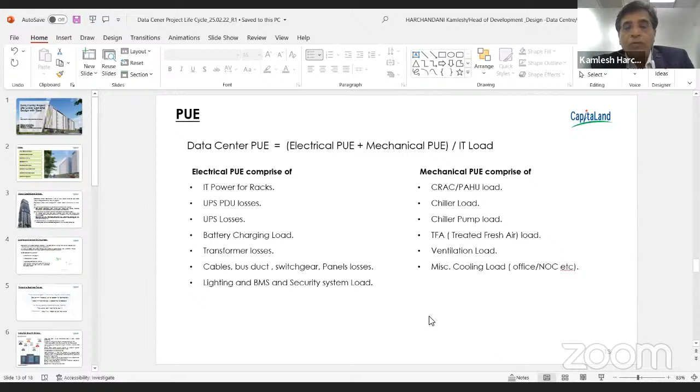Hope this screen is visible to everyone. Carol, could you confirm please? Carol? Visible, sir. Thank you so much.

Again, I would like to thank the Indian Steel Construction Council for giving me this opportunity to talk on the data center subject, specifically on project lifecycle, cost, and design with steel.

To begin this presentation, I would say that, like most industries, the data center industry has evolved in recent years. I think Mr. Gupta also spoke about the growth happening in this industry. In fact, in the current central fiscal budget, the data center industry has also been given infrastructure status, which will definitely give a significant push to the country's digital infrastructure.

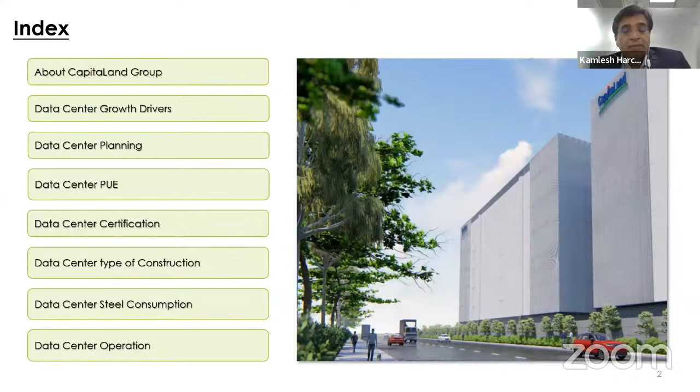To move on to this topic, I'll talk about the particulars in this slide. I'll take a minute to talk about our group, CapitaLand Group, and the growth drivers - we've already heard from Mr. Gupta, who gave very good inputs on the growth drivers for the data center industry. I'll also touch upon how we carry out data center planning, followed by efficiency in data center certification, the type of construction we use, and data center steel consumption. These are the topics I'll be covering in brief in the subsequent slides.

Starting with CapitaLand: we are Asia's largest diversified real estate group, headquartered in Singapore. CapitaLand's asset under management is about 137 billion Singapore dollars. The most important point I want to highlight is that our CapitaLand Group has been awarded Global 100 Most Sustainable Corporation in the world in 2020. So we are quite a stable organization, and with this we are also getting into the data center business.

We carry deep domain expertise in the data center business, where we develop greenfield and brownfield data centers, and we have a global presence in data centers. We are operating 4 data centers in Singapore, 11 in Europe, and 1 in China. Back in India, we will be setting up data centers starting from Mumbai, Chennai, Hyderabad, Bangalore, and Noida. So we carry good expertise in managing and operating data centers successfully over the past few years. Moving to the next slide.

First I wanted to talk about how business trends are changing in today's world. The time has changed in the current digital world, where Mr. Gupta has also touched upon those points. Earlier, people used to adapt to technology, but today that has changed - technology is actually adapting to people. With this, customer interactions are also flipping. So it's rightful to say that the world won't come to your IT; it's actually your IT that will need to go to the world. That's how business trends are emerging today.

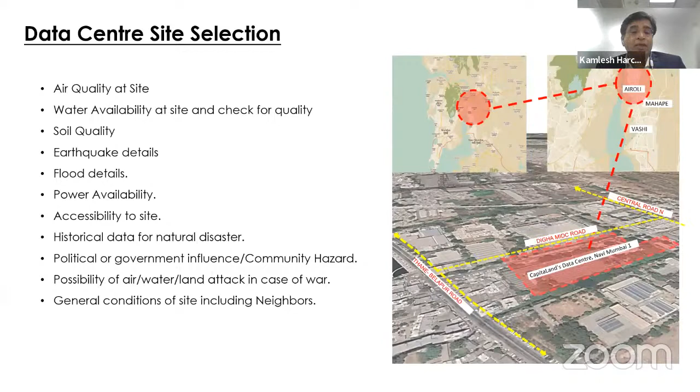Is it only the timeline someone outside sees, that the timeline for data center build is between 17 months to 21 months? Is it only limited to that? So let me give you a brief on what it actually follows largely for most industries when you actually think of setting up a DC in any continent.

You do the market research, which has certain timelines into it. You also carry out the selection of the land parcel. Parallelly, you make out the due diligence of the site in order to ensure the suitability of the land. Over and above, you start working on your design process, and there is a good amount of time you spend not only in the design.

You also go for authority approval, which can range from 6 months to 1 year. So the benchmark to start off your construction at site would be once you get the EC or CTE, the consent to establish, to begin your construction at the site, followed by the construction cycle which I mentioned, and finally with production, the DC is live.

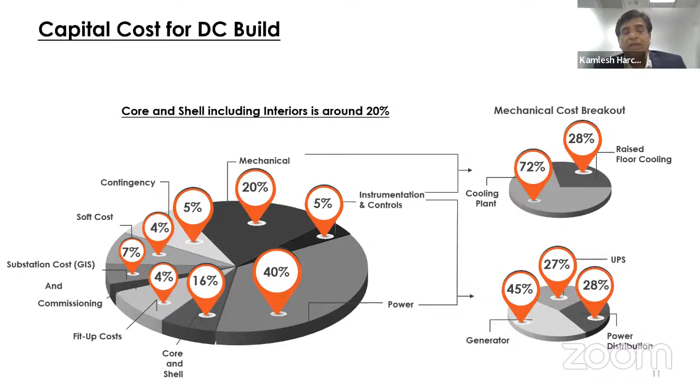So while we were talking about the capital cost of DC, what is very important here is PUE, which is power usage effectiveness. This actually indicates at what efficiency your data center is operating, and it's nothing but a ratio of your total power requirement for a data center facility versus IT load. This PUE was introduced by The Green Grid in 2007.

So when I say the ratio of total power versus IT load, there have been discussions in past years about where this IT load is measured: at a rack level, second at the PDU level which distributes power to the racks, and third at the UPS level. There will be a considerable change in terms of PUE, because when you measure PUE from the UPS for IT load, your losses come into picture for the UPS and the distribution losses before it finally reaches the rack. So it all depends on the way you want to measure this PUE.

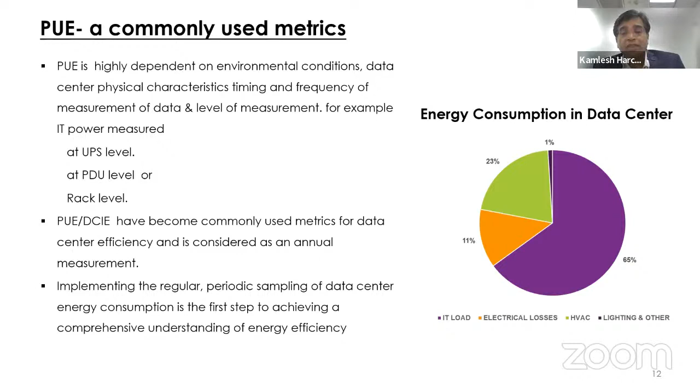But of course, what is important here is where the power is to be measured, so you can target how efficient the data center has to be designed in the beginning itself. Of course, there are parameters to look at for how the efficient design can be made.

So moving on to the next slide. When I was talking about PUE, we have to look in a granular level at how this PUE formula is actually comprised. The PUE is comprised of your electrical PUE, which is the power consumption taking place, and the mechanical PUE, divided by the IT load. I'm talking about these components because you will target these aspects when you are actually setting up a design for your data center.

Why? Because let's say if I talk about the UPS losses, obviously you will ensure that the UPS which you have selected comes with an optimum efficiency. Optimum efficiency in the sense -- we create a redundancy within the data center, whether it's in N+N configuration or N+1 configuration. So what you ensure is the UPS which you are selecting, at least at a capacity of 50%, it should give an optimum efficiency.

Layout plays an important role in terms of equipment placement so that you reduce losses. For example, in a data hall, if you are creating your power distribution within the floor, within the data hall area, obviously your losses will be reduced. So there are a lot of aspects we can target during the design of a data center to make sure it is efficient and optimally designed.

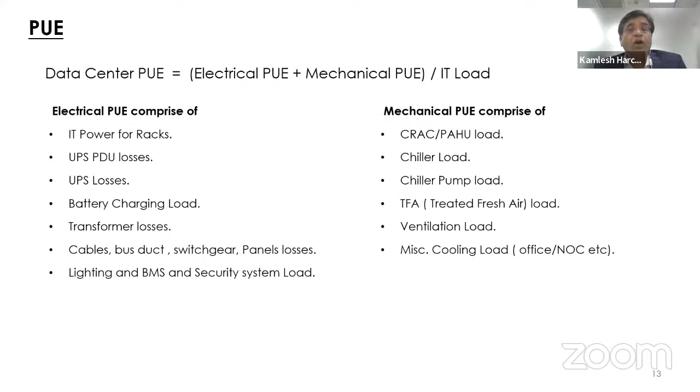Data center certification - in recent years we have seen that data centers are also going for certification. Largely we have seen captive or enterprise data centers going for this kind of certification. There are two certifications which we generally adopt: one is Uptime and second is TIA 942.

Largely it is enterprise and captive data centers that go for certification, but this certification also helps build end client confidence for adopting good design and development practices which can give a high level of performance. Over time, with speculative design, it becomes imperative to use certification, because that finally gives confidence to your end client as well.

Moving on to the next slide, now we'll talk about the type of construction adopted when starting the groundbreaking for the core and shell design. You do construction in three different formats: one is RCC structure in the cast-in-situ method, one is RCC structure in precast, and third is PEB with steel structure building.

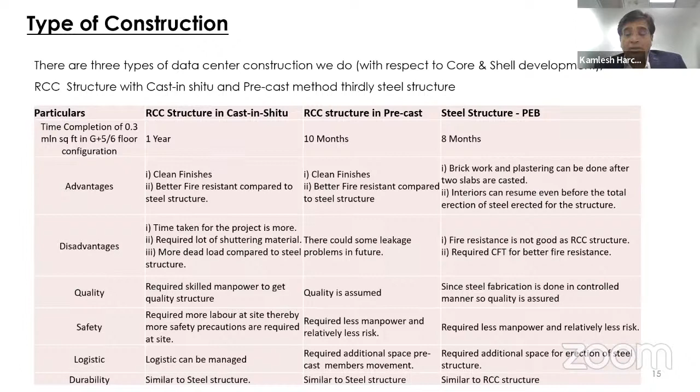Adopting steel structure in recent times has really taken a back foot because of the cost escalation over the last 2 to 3 years. Before I talk on this, let me give you a glimpse of how steel has been used in data center construction, not just limited to core and shell, but also with respect to other DC infrastructure - creating a platform for a DG set, creating a platform for chillers on the terrace. Steel is used in almost every piece of equipment, and this has really escalated cost in recent years.

So maybe let me give you an example comparing a commercial building and a data center building. The steel requirement for a normal commercial building tends to be around 6.5 to 7 kg per square feet. For a data center with a 2000 kg per square meter floor loading requirement, your steel consumption almost goes double. For a steel structure data center building, this is almost 2.5 to 3 times your steel requirement, rather I would say double, compared to cast in situ.

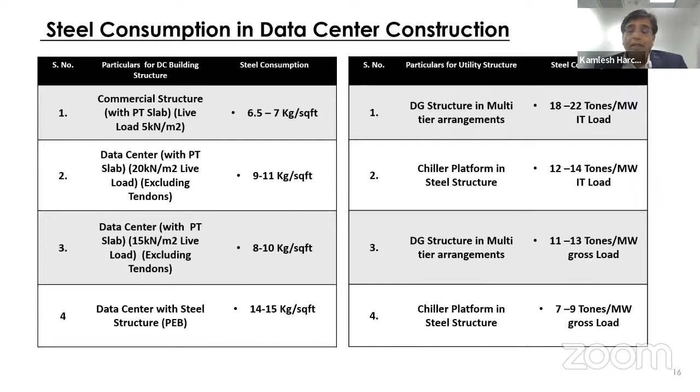Last, but not the least, here I will talk about the data center operation challenges.

You are monitoring your PUE closely, so that each aspect of the data center equipment is being watched closely. As we do the monitoring of data centers, moving on we will closely see how technology is giving opportunity to increase efficiency on the equipment used in data centers.

Why am I giving this example? If you go back 8 to 10 years ago, the UPS losses we've seen were touching around 92 to 93% efficiency. Today the UPSs available can give you efficiency up to 96.5 or even 97%. Why is it so important?

Moving back, we have also seen that if you have limited space for implementing the data center, we have also seen the technology being used for a rotary UPS, where you avoid placement of a DG set within the campus. But because of constraints on UPS efficiency over the period, we have seen that efficiency improved. Now no one is talking about the rotary UPS.

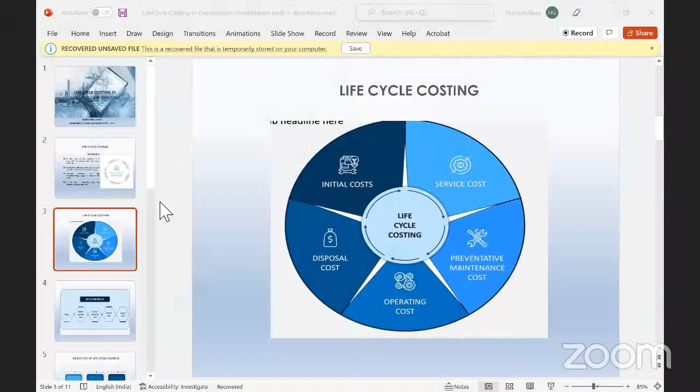The life cycle cost of construction is divided into 5 parts. First is service, second is preventive maintenance, third is operating cost, and the other is disposal cost.

The operating cost has already been discussed by Mr. Kamlesh, so I won't talk about it again. Operating cost is whatever the MEP cost is—that is the operating cost. The rest of the costs we have discussed.

The life cycle cost includes total capital, lifetime operating cost, operating maintenance, disposal cost, and the last one is the disposable value, like salvage value. When we discuss salvage value, steel gives you a salvage value while concrete gives zero. We can also include the salvage cost in the life cycle cost.

Why are we required to do life cycle costing? First, we can understand what is the total cost during the life of the project. We can assess for the management or the team what is the cost.

Second is to identify the reduction effort likely to be more effective. Like suppose we are using RCC, steel, and a number of other things like walls, brickwork, dry wall panels, depending upon the material.

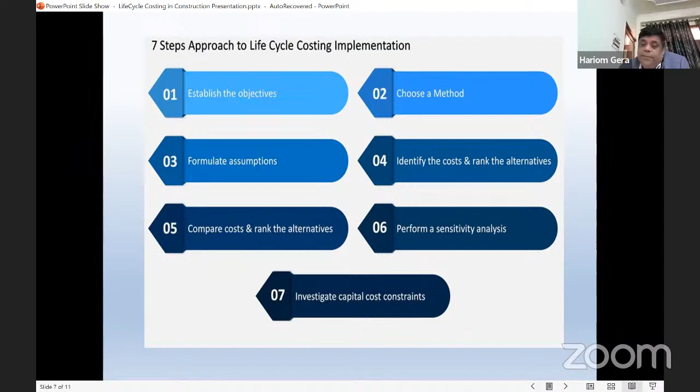When we compare steel and concrete structure, the market share of fabricated structure is only 5%. The rest of the world we have already discussed - this is 65 to 70%.

Perception - this is a reason, this is a perception. Second, absence of quality. Third, experience and efficiency of structural steel work, limited availability of the range of steel sections, and the same for concrete as well. But all of this is perception.

It is the first thing - this is expensive. This is definitely the initial cost coming higher than concrete. But when you are talking about the total cost after 50 or 60 years, then this is very cheap - it may be 20-30% cheaper than concrete also. So when we start the costing of the project, we can consider the life cycle cost also.

The quality of the fabrication - nowadays the number of contractors available, number of manufacturers available, the quality is increasing slowly because steel buildings are increasing day by day.

Structural steel work also design. Nowadays structural consultants, a number of them have started steel design, so it is easily available for steel structures. Range is also available now - number of UB, UC sections, WPB sections, NPB sections, general JSPL sections - each and every section is easily available.

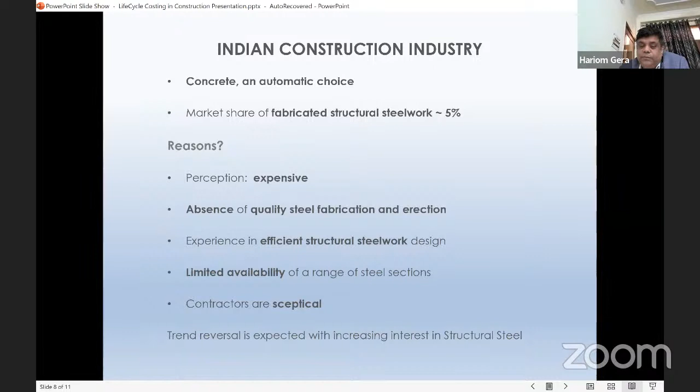Rolled sections also - nowadays the plated rate is higher and the rolled section is cheaper. Slowly the market is shifting to rolled sections, which are very easily available, plus there's less requirement of time for fabrication, and the number of contractors is also increasing. So there is no issue in the steel construction industry.

When we talk about sustainability, with the growing construction market, sustainability has become an increasingly important issue in the construction industries. Nowadays, the London Stock Exchange has correlated the sustainability performance of larger companies in the UK. They're showing that the 50 most sustainable companies perform as well as the FTSE 100 index. So sustainability gives companies some economical value too.

Sustainability development depends upon three factors: environmental, social, and economical. When we talk about environmental, steel construction requires less embodied energy compared to RCC.

When we talk about data centers, the span is generally very high - like an 11 by 11 meter grid. Second is a 15 by 15 meter grid. Third is an 8 by 16, 17 meter grid.

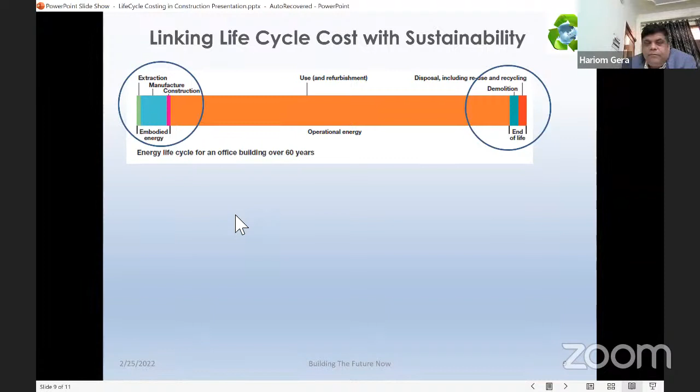The life cycle cost - there's a formula given for how to calculate the life cycle cost of a structure. First is the initial material cost, which includes RCC and steel. Second is the additional initial cost in steel, like corrosion protection or fire protection. Additional initial cost for concrete is zero, and initial material cost in steel is higher. If we bring this together, concrete is always about 20% cheaper.

But when we talk about maintenance and end of life, maintenance cost in steel structures is very less. When we talk about an internal building, like a data center, it's enclosed by walls, then maintenance is required for the internal material.

When we talk about steel, maintenance is required every 20 years. When we talk about RCC, it's required every 10 years. In 10 years, you can check if any cracks have developed in the RCC, because the loading is very high. Maybe due to creep, maybe due to long-term shrinkage, cracks will develop in the RCC structure, because we're calculating based on our past experience with data centers.

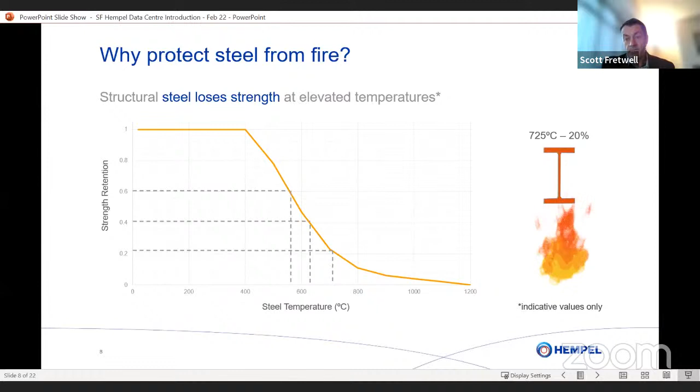We want to limit this temperature rise in steel to prevent steel structures losing stability in the event of a fire. This is important for personnel protection. We want to get people out of the building, and we also want to get people into the building—emergency responders—to tackle the fire.

We protect steel from fire for asset protection. We cannot rebuild buildings every time there's a fire, so maintaining the structural stability of the building after a fire is also important. The contents and assets within the building also need to be protected. And obviously there's also legislation—countries around the world have their own legislation on how we should fire protect steel buildings.

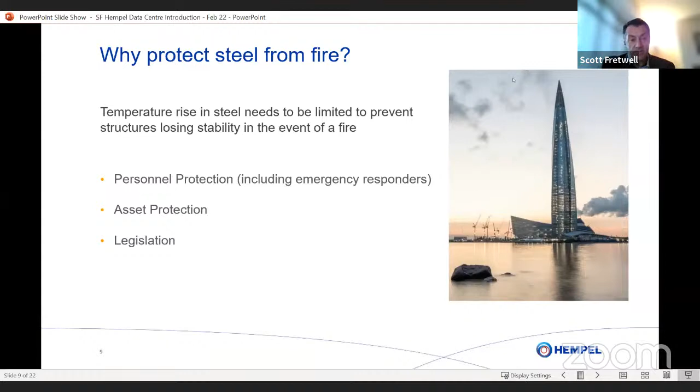Hempel over the years has provided lots of intumescent coating protection to many data center projects for many different customers. These are the majority of global data center projects—we have many completed and many currently ongoing.

But when we started getting involved in data centers, we found it's a little bit more complex than normal buildings. We obviously need to protect the building and both its human and electronic assets, and this can be quite complex. In addition to protecting the steel structure, we have to make considerations for the building contents, especially protection of the electronic elements from dust creation during and after construction, and also involved in fire protection.

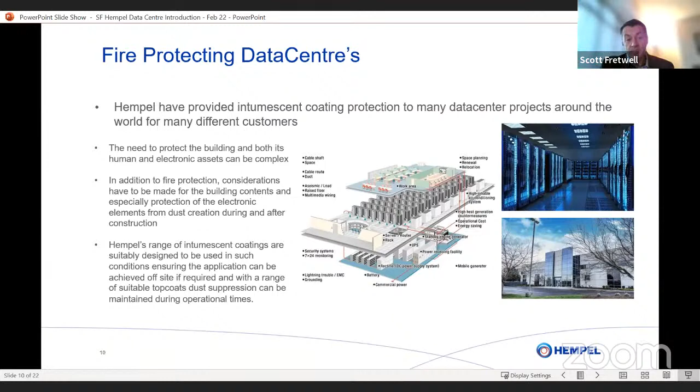We have a range of intumescent coatings which are suitably designed to be used in such conditions, ensuring application can be done off-site if required, and that dust suppression can be maintained during operational times. Dust suppression isn't something we really link with coatings, but it's really a key area when we look at fire protection.

We spoke about the efficiencies and reliability of data centers. Dust suppression is a key one. We know dust particles contain moisture, organic material, and various minerals and chemicals, and all of those will greatly affect the reliability and lifespan of the average computer if overexposed. Dust contains conducting material and metallic elements, which can lead to signal errors and abrupt part failures.

Internal dust accumulation is one of the main principles of premature failure and reliability. We also see questions around maintenance of heat. When in contact, dust also acts like an insulating blanket, which prevents the necessary circuits from cooling. This can cause overheating and electrical shorts, and it's proven that temperature can increase by nearly 30 degrees Fahrenheit due to the buildup of dust. This is significant and can lead to complete failure.

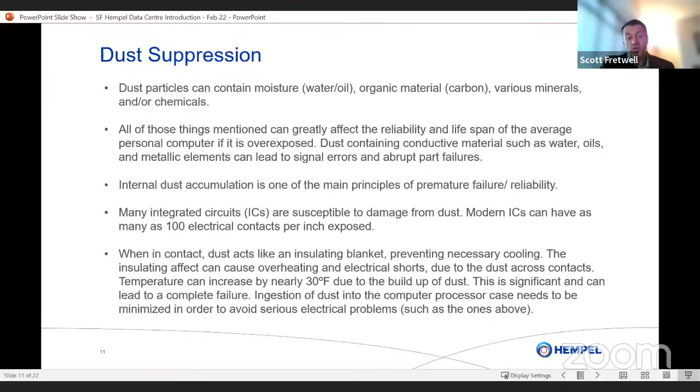Ingestion of dust into the computer processors also needs to be minimized in order to avoid serious electrical problems. So why is that important when we look at fire protection? Well, obviously, when we see on the market, we see the general key technologies used in fire protection.

We have cement sprays. And again, when we look at cement sprays, we look at application on site. There is constant movement from the steel structure, which creates cracking, even after installation and movement of the structure. With cement sprays, you always get the element of dust, and the cracking creates more and more dust as it goes into its service life. Cementitious sprays are also not top coatable, so we can't limit that dust creation.

The other possibility for fire protection is fireboards. But again, these have to be installed on site, and we know that these are fitted, chopped, and cut on site. And again, it leads to a high level of dust suppression required.

However, with intumescent coatings and their properties, this is negated. Intumescent technology creates a low installation cost. It allows for more open building design. Its use of different steel sizes and shapes adapts to shape and flexion, so there's no cracking like we get in cement, no movement. It's fairly damage resistant, with a very low risk of corrosion under the insulation compared to board and cementitious spray. Importantly, it can be applied on or off site, and it offers little or no dust suppression.

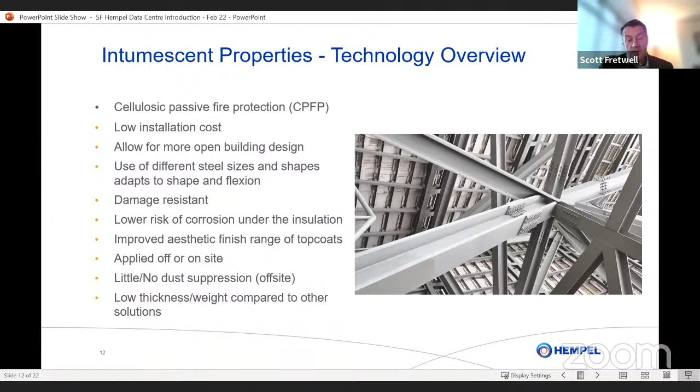But why should we care about paint? We see many times, and we've had many conversations with engineers and architects, that it's a contractor decision, a generic specification is fine, and it is a small part of the project. But as we've just proven, when we look at the application of any fire protection system in data centers, we have to have key considerations on dust suppression and protection.

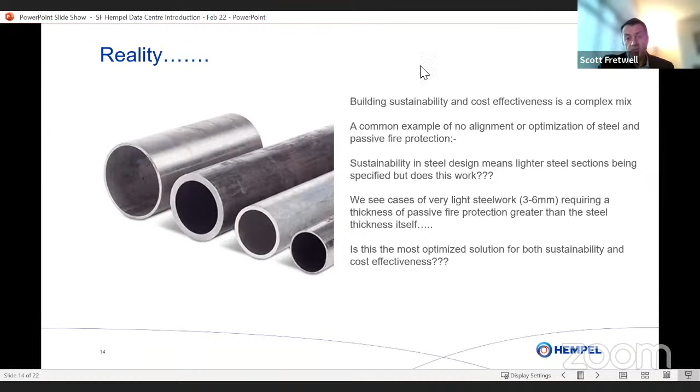And what we also see moving forward in reality is building sustainability and cost effectiveness is complex. A common example we have seen when there's no alignment or optimization of steel and passive fire protection is that, through sustainability in steel, lighter steel sections are specified and used. But does this work? Because when we start using very light steel work, sometimes 3, maybe 6 millimeter beams or hollow sections, this steel itself starts requiring a higher level of thicker passive fire protection, perhaps greater than the steel thickness itself.

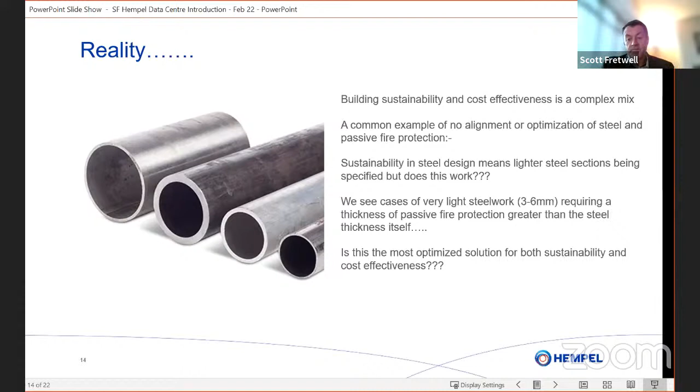Is this the most optimized solution for sustainability and cost effectiveness? I think in our work with engineers and architects across the globe, it's not. We've worked very closely with engineers and architects at design stage and engineering stage to make sure there's full holistic synergy between fire protection and steel design. When we start looking at steel and fire design together, this can bring many added benefits to any project - commercial, on the site program, and also sustainability.

So what value can we bring, or what value have we brought in the past as a paint company to the data center market? Well, we've produced reduction of project costs. We have our own in-house fire engineer, which works with engineers and designers across the world to make sure there's synergy, a holistic view of fire protection and steel. We have a global product supply availability with consistent quality, and we have experienced technical services ensuring quality of application and performance available globally.

With fire engineering, we can look at lower paint thicknesses, reducing material costs and application. And we have global experience and knowledge of fire protection and the data center market.

By getting in at an early stage as well, we can also bring advantages to the site program. Our products and their consistency reduce downtime. All our fire protection factories are audited and third-party accredited. Our technical service guides ensure quality of application and performance.

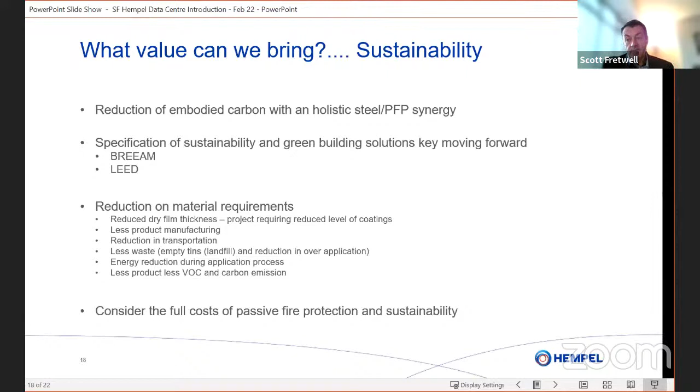And what else can we bring as a company? We bring experience. Hempel is a global company with huge experience in fire protection, anti-corrosion specifications, and experience. Whether it's energy infrastructure, marine, or anti-corrosion specifications, we have a big track history as a company involved in major projects, supplying major projects, and working with some of the major engineers, architects, applicators, and fabricators.

And we do try to create additional value for data centers. Again, we agree with the previous speakers, this is a growing market across the globe. And therefore, we need a global approach, a coordinated global approach. At Hempel, there will be a single point of contact, a focused technical resource. We have much experience in cross-border and pan-continental projects, multi-level relationships, again, with applicators, fabricators, engineers, and designers.

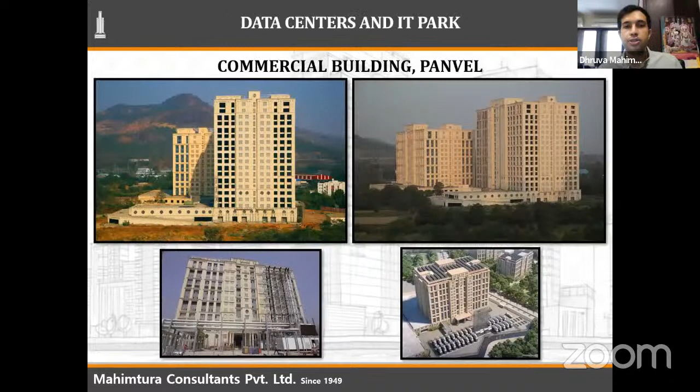Brief introduction. It was initially constructed in 2016 with 1 million square feet. Then the client didn't have any sales of that commercial building, so they decided to convert it into a data center. It's got a basement, 3 podiums, and then 12 stories, which was originally designed for commercial loading. The grid is about 10.8 meters by 10.85 meters and comprises of post-tension slabs with an earlier flat slab and column drop kind of system.

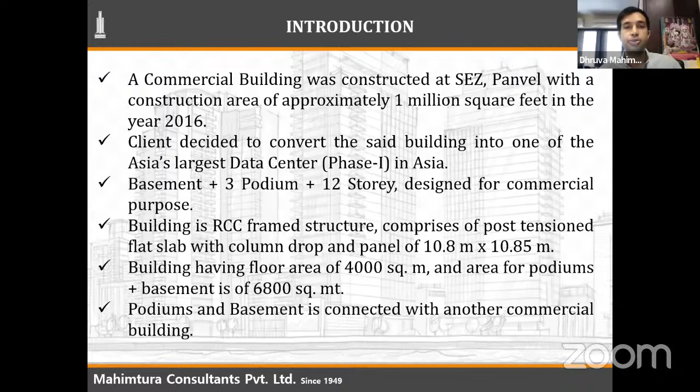The typical floor plate is about 4,000 square meters, and the basement is 6,800. And the podium and basement is actually connected with another commercial building, which is slightly taller than this one.

So this was our brief. We had to convert this commercial IT building into a data center. Basically every alternate floor had to be upgraded to take a loading of 1,500 kg per meter square. Then you had the data center floors, and you had your battery floors, which had slightly lesser loading, 875 kg per meter square. And we had to upgrade it from the 400 kg per meter square live load.

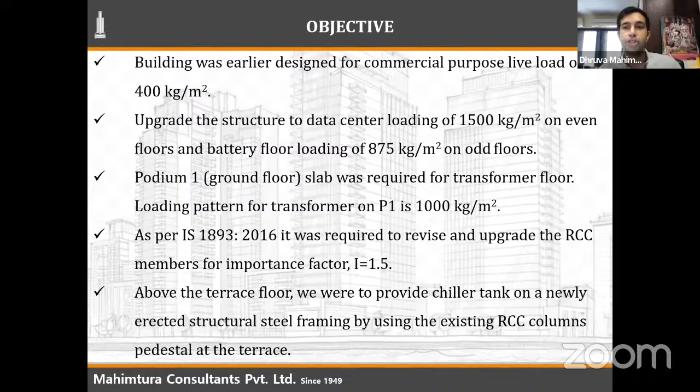In addition to that, there was a transformer added at the first podium slab, and then a chiller platform on top of the terrace, so we had to do that as well. And since we were upgrading the structure, we had to upgrade it to the latest IS codes. So as per the IS 1893:2016 code, we had to jack up the importance factor to an importance factor of 1.5.

So what we started off with was some non-destructive testing as well as a load test. We carried this out because the building was left on its own as is for a couple of years, so we had to ascertain the existing strength of the building and then use those inputs in our analysis.

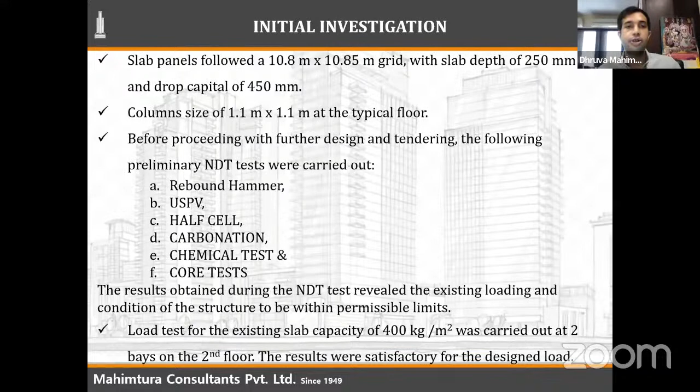We also carried out a load test. This is pretty important because we had to benchmark ourselves and see where we were starting off from, whether the existing slab could take that live load of 400 kg per meter square or not. So that was done in 2 bays on one of the data center floors, and we found our results to be satisfactory in terms of the NDT testing as well as the load test.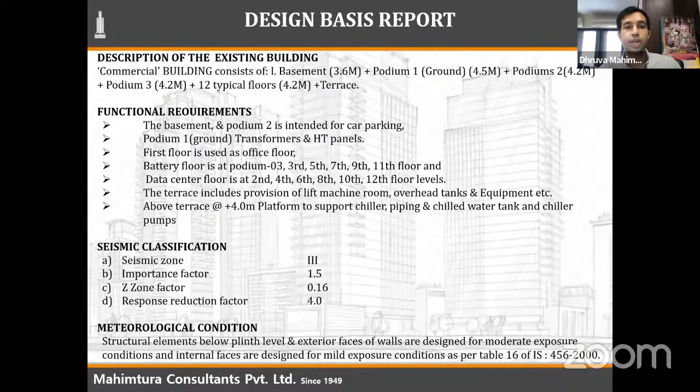A little bit of a design brief: it's in seismic zone 3. We had an importance factor of 1.5. We also had to look at fire rating of any kind of steel members that we were going to use in the upgradation process, so we decided to benchmark it with a 2-hour fire rating for all of those steel members.

We also looked at the soil bearing capacity because now we were upgrading the load, so we had to check the foundations. But we had a good SBC because there was hard rock already available at the site. The existing structural system was basically an RCC column beam frame system with the lift and staircase shear walls taking all of the lateral forces.

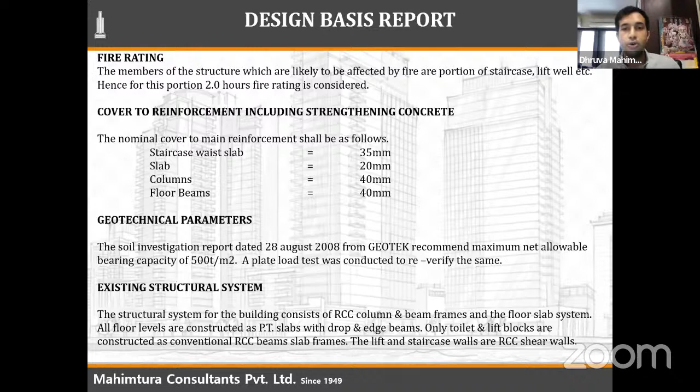We had a PT drop system with edge beams. Only the toilet blocks were constructed with a conventional RCC beam slab system.

Certain grades of concrete were already existing, along with the non-structural wall thicknesses that were also there. Steel grade, regular RCC steel, was Fe500. And then these were the existing loadings that we had.

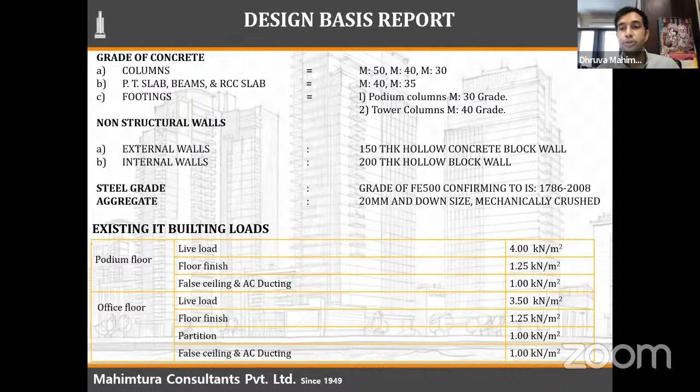So our regular office floor load comprised of about 6.75 kilonewton per meter square, and we had to upgrade that to about 15 kilonewton per meter square. So this was basically what we were upgrading the structure to.

Just want to point out the data center floor, that's what we're focusing on right now. That is a total live load of 15 kilonewton per meter square, with a fixed live load of 10 and then a reducible live load of 5 kilonewton per meter square.

And then the chiller platform coming on top of that, which also had to take 10 kilonewton per meter square. And then you have the fixed component of 8 kilonewton per meter square and a reducible live load of 2 kilonewton per meter square.

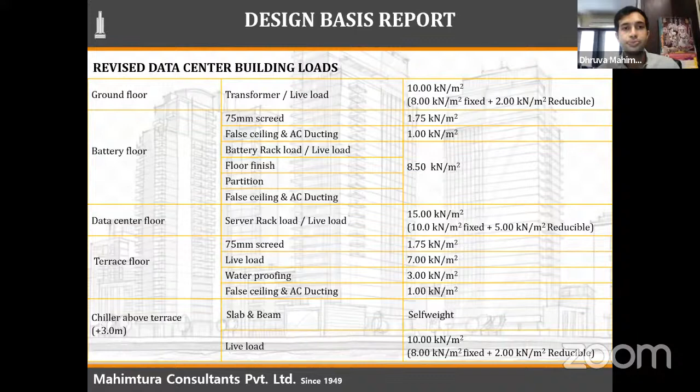This was the kind of strengthening measures that we had to input and carry out on site. So we had to jacket the foundations because the overall loading of the building had gone up, and the importance factor of the building had gone up. So we opened up each and every foundation of each and every column.

We used M55, in some places micro concrete, and in other places regular concrete.

And then for the data center floor, we had to tackle strengthening from the bottom as well as from the top of the slab. The bottom of the slab was strengthened by the use of structural steel I-beams as well as normal carbon fiber wrapping. And then the top of the slab, we had carbon rods along with pre-stressed laminates.

And then we had a 75 mm screed topping on top of all of that, which was a reinforced screed as well, so we could increase the overall depth of the slab. And then the chiller platforms on top.

So we had column stubs from before. We used those column stubs, put a base plate on it, jacketed those sizes of the columns. After putting the base plate, we erected I columns and plate columns with concrete infill. And then after that, we did our connection of the steel grid for the chiller platform, and then we micro concreted the entire thing, basically creating a composite column to support the chiller platform.

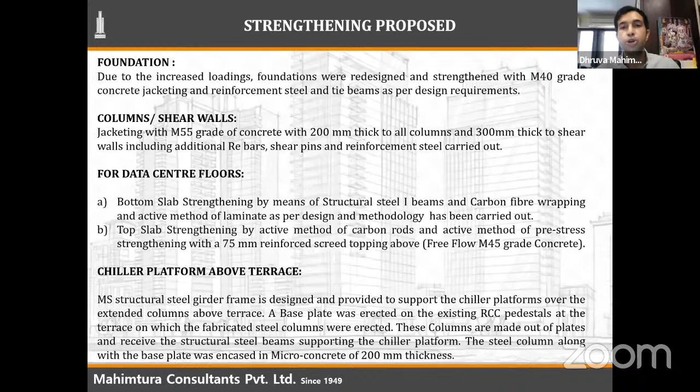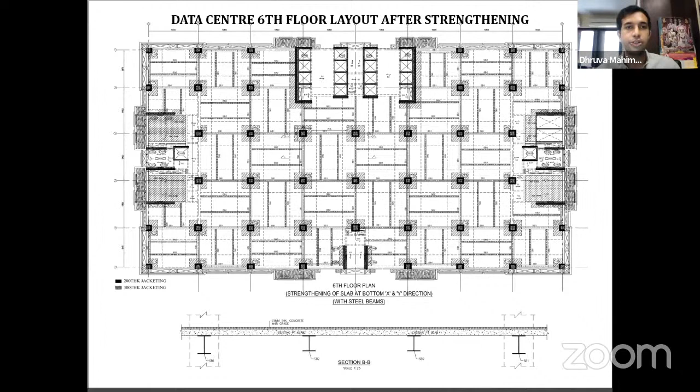And then this is what we did after the strengthening. This is from the bottom of the slab. You can see we have primary and secondary beams. The primary steel beams were about 450 mm wide by 700 mm deep, and the secondary beams were 450 mm wide but 600 deep. And we used 350 grade structural steel.

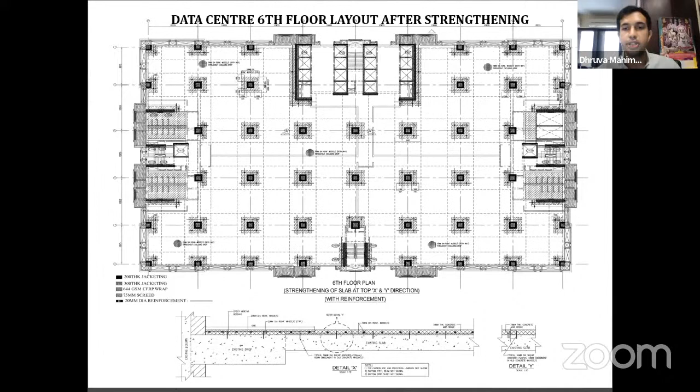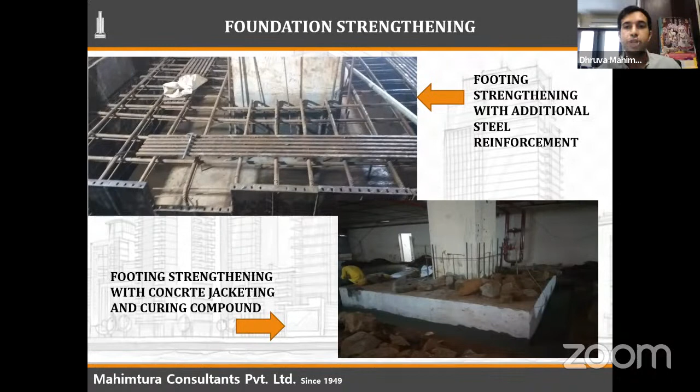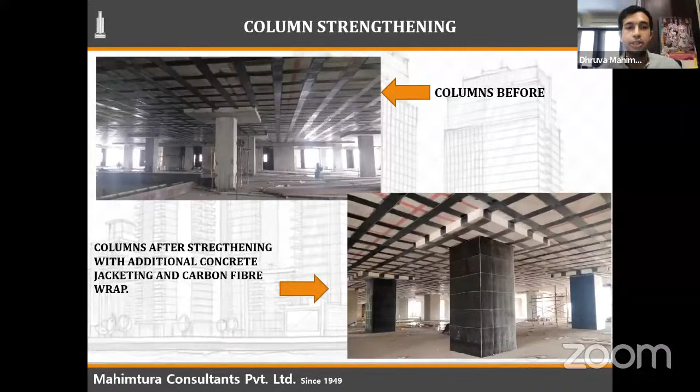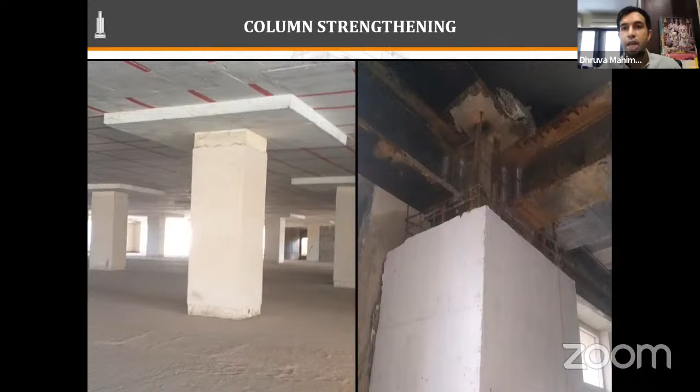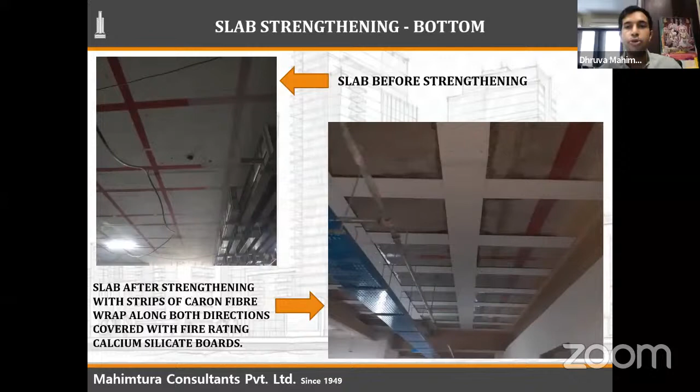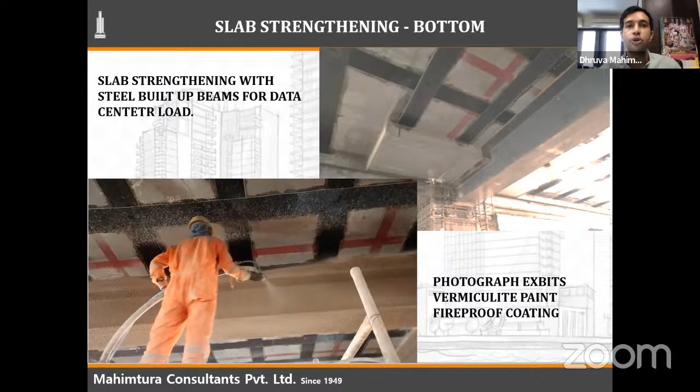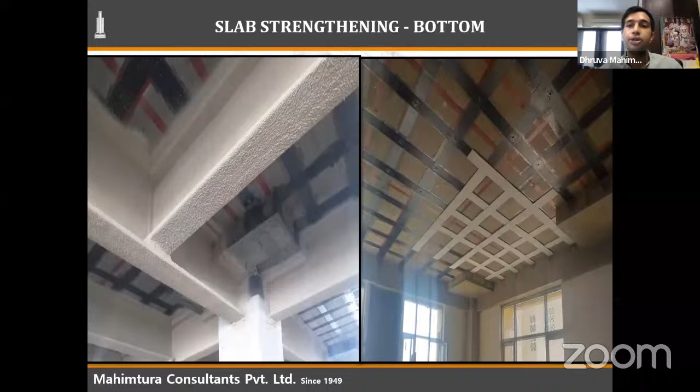Another photo of our I-beams with the vermiculite spray done. And then you have your carbon fiber wrap. And on the right side, you can see how the fire board is placed on top of that as well.

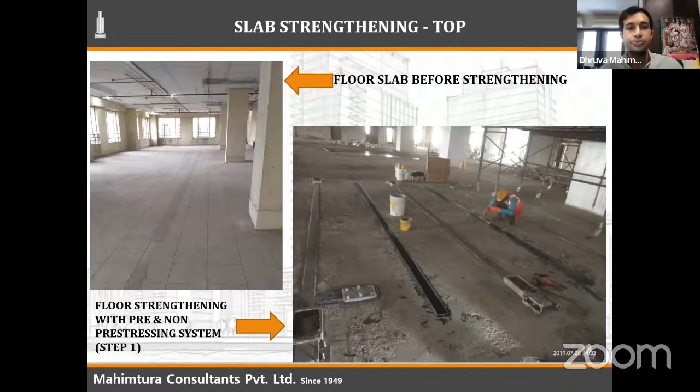And then you have a finished screed on top, your carbon fiber rods in the column drop area, and then the 75 mm screed on top of that.

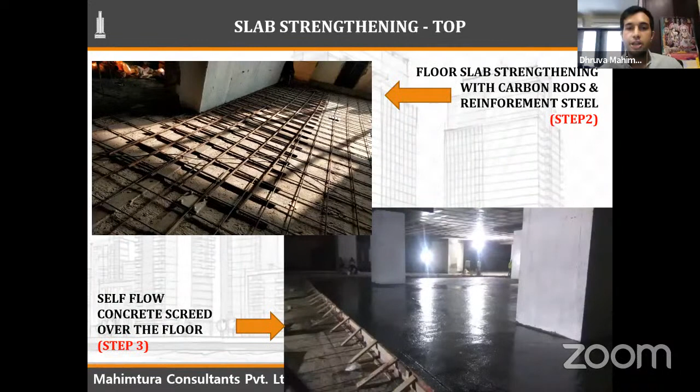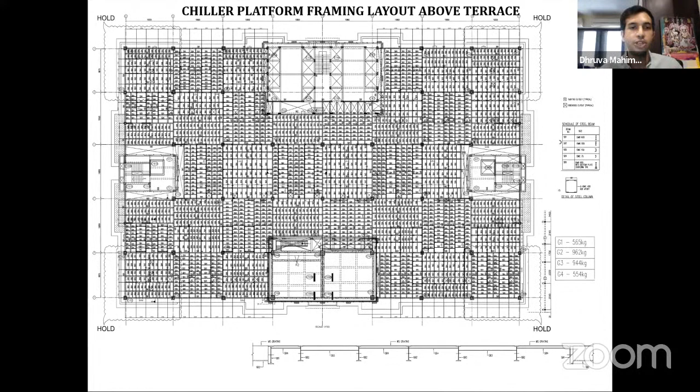And then these are just some details to show you the kind of detailing that was done in terms of the drawing, and then fabrication drawings were made after that.

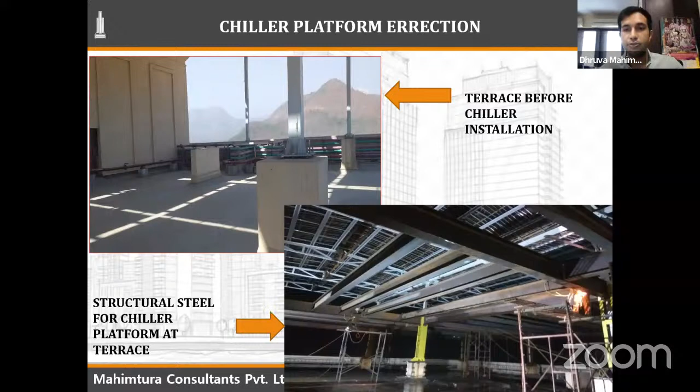This is what we inherited before, and then you can see the final product on the right, bottom right, for the chiller platform. And then you have the final product as well.

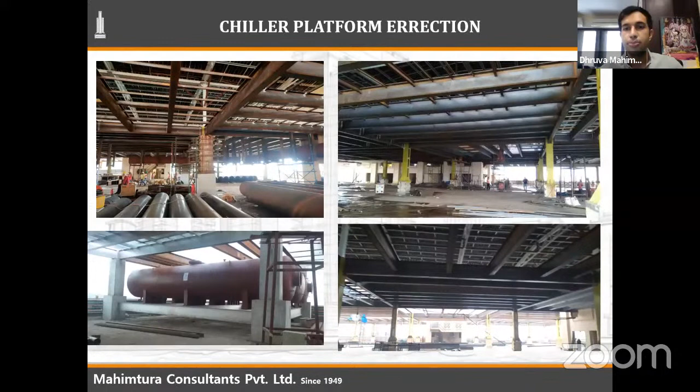On the top, these beams were painted with zinc, and all of these beams were hot dip galvanized as well. We had a zinc epoxy coating.

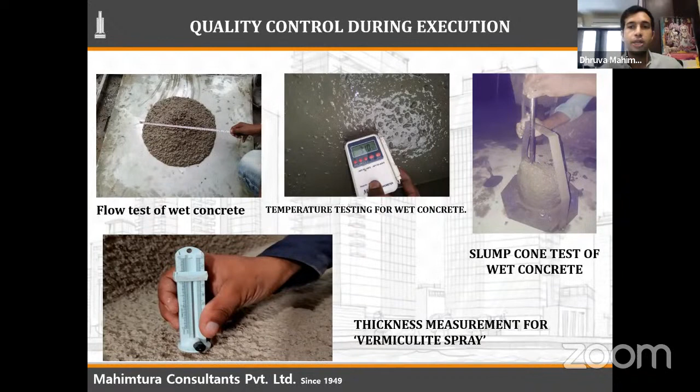And just some quality control that was done on site. We had to measure the thickness of the vermiculite spray. Since we were doing that 75 mm screeding, we had to look at certain quality control measures.

And then just to conclude, what we did was we had to ascertain whether this upgradation could take that 1500 kg per meter square loading. So we redid the load test in that same column grid, those same 2 bays on the second floor. And we did achieve that.

Overall, the first phase was about 4 floors of this overall building, including the foundation jacketing. So the survey time, testing time, design and tender time was done in 3 months. And the overall completion after that, in terms of construction, was done in 6 months.

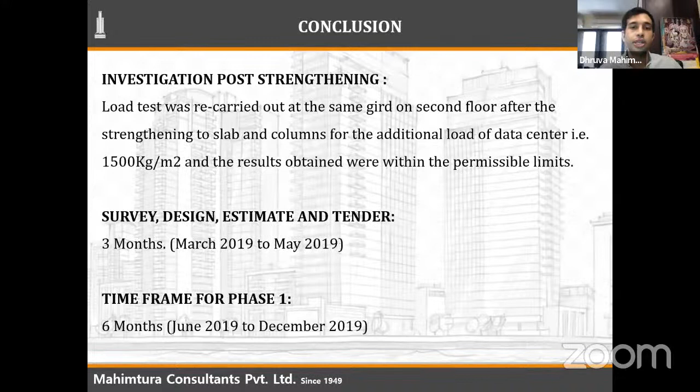So it shows that it was done fairly quickly. The main purpose of upgradation from the commercial building to a data center building was to save time, and that was the ultimate goal, because the client did have a vendor on board, and therefore we did it the way we did it. Thank you. Over to you, Carol.